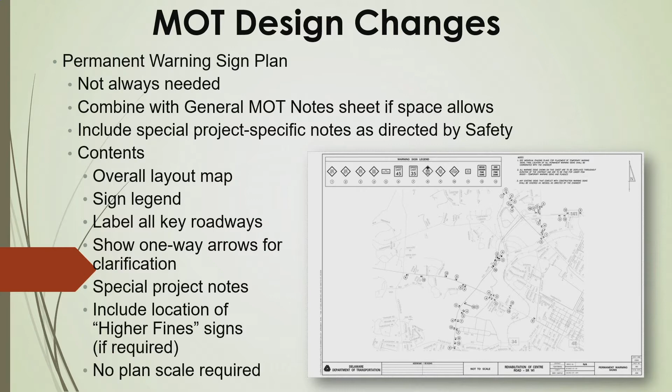Some MOT design changes: we're well aware PCC barrier wall deflects 4 feet, so in some situations we need to pin the barrier. We want to make sure that's called out on the plan so the construction staff know exactly which section of barrier wall needs to be pinned where you don't have the deflection in the construction zone. It also gives the contractor an idea of what he's bidding on as far as quantity.

Some other design changes: we want to show hashing for the length of need behind the barrier wall. Several years ago, a young lady lost her life after getting behind a barrier wall - not saying this was the case in this situation, most crashes have more than one reason. By showing this hashing, it gives construction and maintenance staff an understanding that you can't have any equipment or material in this run-out length behind the barrier wall. You want to give vehicles, in case they run off the road, a clear path to recover their vehicle without hitting a fixed object. Showing this hashing highlights the zone we're looking for.

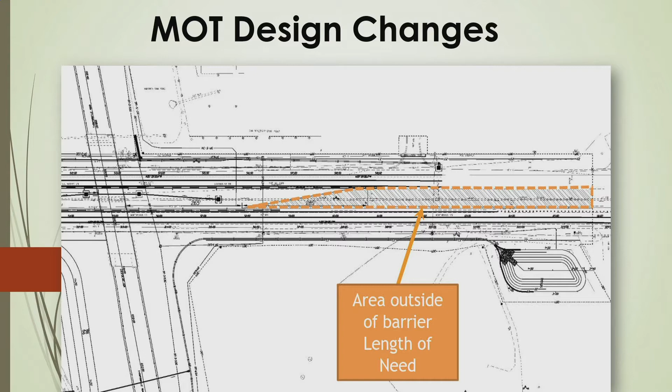We also want to show the taper inside lane closures. It depends on the speed, but this takes the guesswork out of the formula for your taper by showing it right on the plans - the contractor and construction staff know exactly how long that taper needs to be. We also came up with a new flag or head sign that says MUTCD compliant, and you put your own face in there.

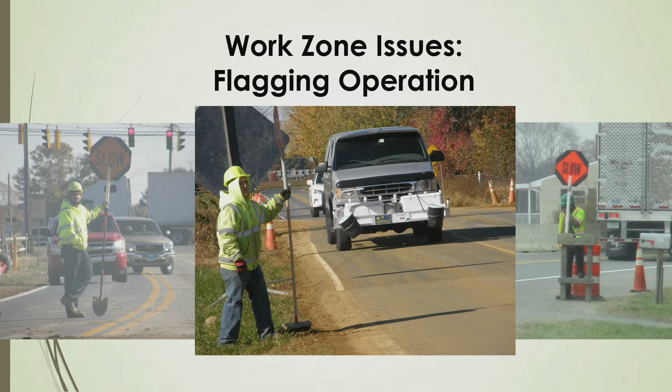Some common work zone issues - I know the secretary wants us to be innovative, and some of these flagger paddles are. They double as a shovel or a broom, but they're not compliant. One gentleman was very innovative and created his own sign stand with footrests, and it actually came with a cup holder.

Pedestrian detours - I know it's a problem, I know it's difficult. We go on these construction projects, you have a lot of hurdles you're trying to get through, and pedestrian detours is just another hurdle you have to deal with. I have a fantastic staff and I rely on them heavily. I'll tell you, if you run into a problem where you have to have a pedestrian detour, we'd rather use typical applications, but if you run into a problem, we'll work with you to help get you some sort of ped detour to get you around the construction zone.

Still seeing some signing issues. If you have a temporary sign, it's up more than 72 hours, it needs to be at least 5 feet above the ground.

When placing signs, you want to make sure they're not directly behind another sign. The traveling public needs to know exactly what they're coming into.

If they're driving into a detour, they need to know that ahead of time. If signposts aren't driven to the proper depth, we're going to know pretty quickly, because the first windstorm that comes through, that sign's going to be laying over at a 45-degree angle. We've all seen them. So make sure they're driven to the proper depth.

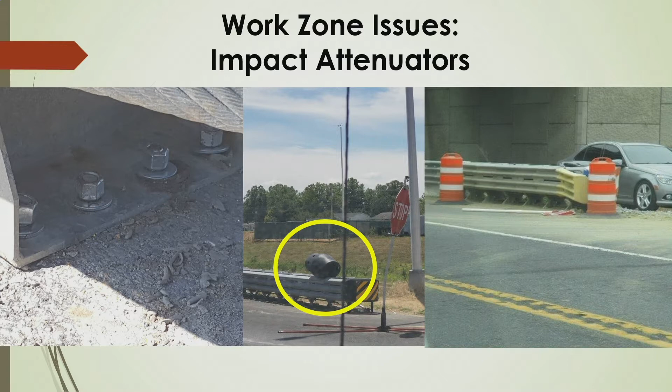And there's also a clear zone beyond the impact attenuators where you don't have equipment parked or vehicles. I'm not sure whose car this was, but obviously if a car gets behind in the work zone, they're going to hit the car instead of the impact attenuator.

Temporary barrier wall. Again, barrier wall deflects 4 feet if it's not pinned. If you have a drop off inside that 4 foot, that barrier wall is going right into the trench, and that vehicle is going to enter the work zone. So we want to make sure that we look at the plans when we're designing them, and make sure when construction lays this wall out, that they're going to have the proper 4 foot deflection.

Some of the things we're looking at is, right now our spec reads that all temporary barrier wall must have a letter that shows that it's 350 compliant from the manufacturer, or the wall needs to be stamped as 350 compliant. I think every piece of barrier wall needs to be stamped. That way the inspection staff in the field knows whether that wall is 350 compliant or not.

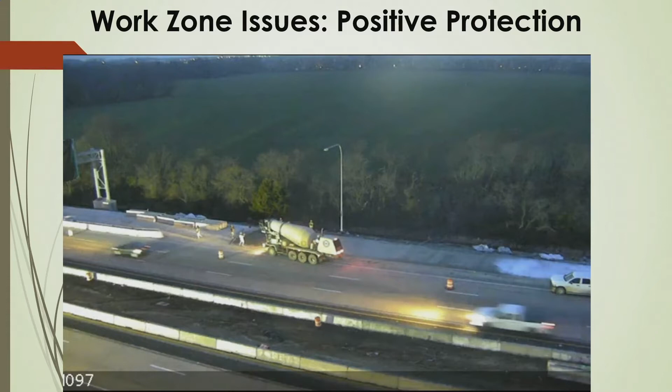Same project. We worked with construction a lot to work through some of these issues, but this contractor just didn't get it. So I seen this shot. Again, we had vehicles, no buffer lane, no positive protection for the blunt end of the barrier wall.

As you're entering a work zone, you need to make sure that you are displaying a clear message, so as the vehicle's coming in, they know exactly what to expect. We need to do our part. We ask vehicles to slow down in work zones, and we also need to make sure we're displaying a very clear message about what's going on.

So I hope this plays. I hope that Pam, you think this will play? So this is a video that we took going northbound on Route 1. They'll play? Awesome. Everybody makes mistakes, it's easy to do. But you want to be cognizant of what you're doing in your vehicle to notify the public of what to expect. Go ahead and hit play for me.

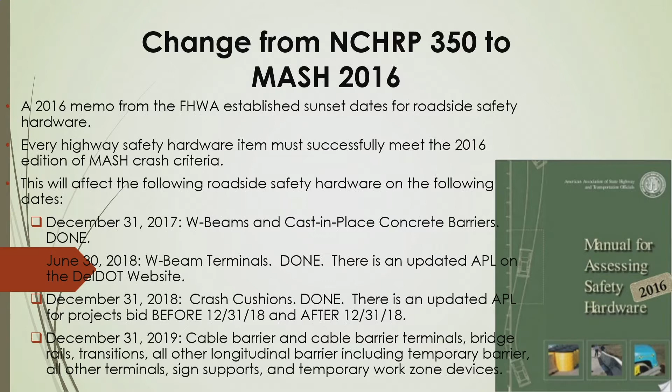fall under the temporary work zone category that are going to have to be MASH compliant. So why do we change, and why does MASH change? Because our vehicles change - the size, the center of gravity, the makeup of the vehicles. Some of the trucks now have aluminum bodies, which is crazy to me, but hey, it is what it is. We're starting to evolve, the manufacturers are evolving, so we have to change our testing criteria, which is why MASH changes.

What's next is our approved product list. This is why we have approved product lists - these products get tested to make sure they're going to react properly. Our safety section is working on an approved product list that's 350 compliant. Right now every contract submits that big fat 350 packet. If we just have a list of approved products that are 350 compliant, it'll cut that out. It'll also help us roll into MASH compliance, as MASH 16 compliant devices come online we can just update those item numbers and note whether or not they're MASH compliant.

So why do we have NCHRP 350 and MASH? Can we play this video? It's not playing automatically... if it won't play, that's fine. There we go.

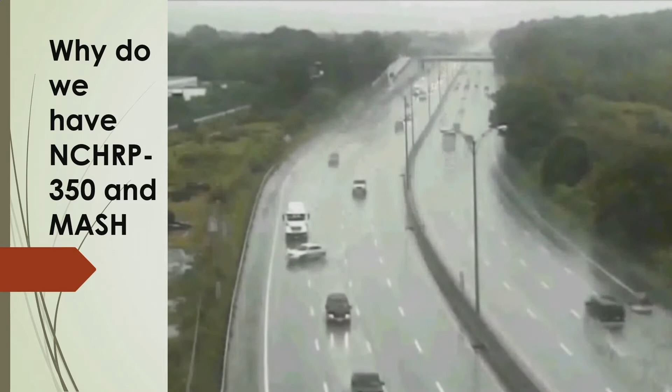Coming from the right side of the screen to the left.

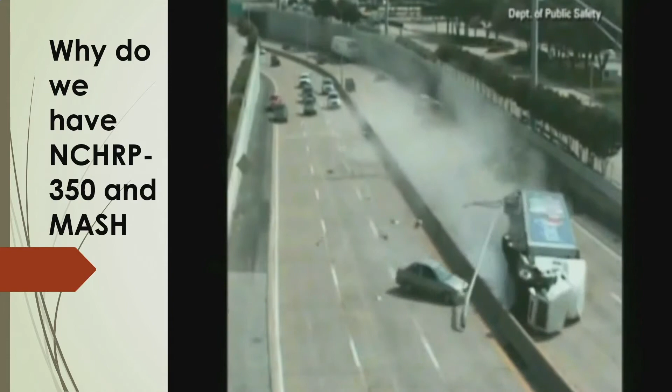You're going to see in this video where some of our roadside safety hardware worked great, and some did not, which is why some of the things we have and use have to be updated, especially some of our barrier wall. Some of the guardrails worked properly, some did not. Some of the barrier wall needed to get higher for MASH compliance, which is why that tractor trailer went over the other side of the roadway.

So why is product testing necessary? It wasn't that long ago we had the ET Plus that penetrated vehicles - massive lawsuit, changed the way we do things. We want to make sure that whatever we're putting out on our Delaware roadways is going to react properly. So that's why you have product testing.

We're getting a lot more requests for guardrail to be installed across the state. Some of the stuff we push back on, Pam is fully aware of - just because sometimes guardrail isn't the answer. Sometimes installing guardrail can be a greater hazard than actually running off the roadway. Ideal situation, a vehicle goes off the roadway and is able to recover on their own. This is worst case scenario - this person lived through this, by the way.

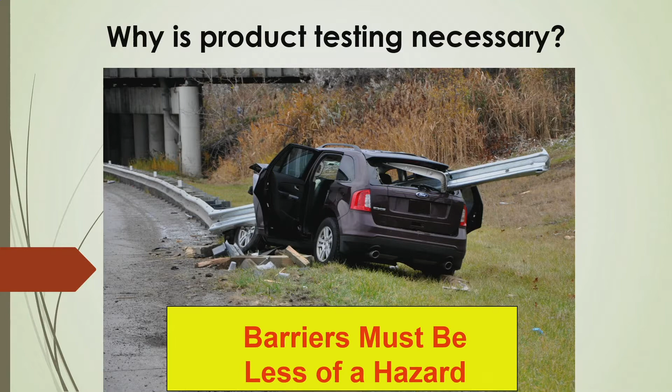So just make sure the barrier we put out in the field doesn't become a greater hazard than a vehicle running off the roadway. I'm going to close out with special events. So what are special events? These are parades, concerts, NASCAR events, running races, bike races, block parties - anything that happens on Delaware roadways.

Last year there were over 800 events approved under the special events section. Of those 800, 275 required DelDOT to manage the MOT for the event sponsors. We're currently seeing an increase in special events within the state of approximately 10% a year.

So why am I bringing this up? Why does this affect you? Well, it affects your projects, for one. Under Title 17 of the Delaware Code, Section 141 and 29, policy changes mean temporary traffic control costs for special events will be waived for nonprofit and charitable events. So if you're a nonprofit doing a special event on Delaware roadways, and we have a lot of them, you'll be able to have us come out and take care of your MOT at no cost to the event, because this way the money the charity raises goes right towards the charity. But this also puts an additional strain on our resources and capabilities, because we only have so many people.

So what does this mean for you? We want your help if you want to give it. If you want to fill out an SEO application, which is sent out annually, you'll need to take an incident management training course, which is taught by the Godfather, Professor Donaldson.

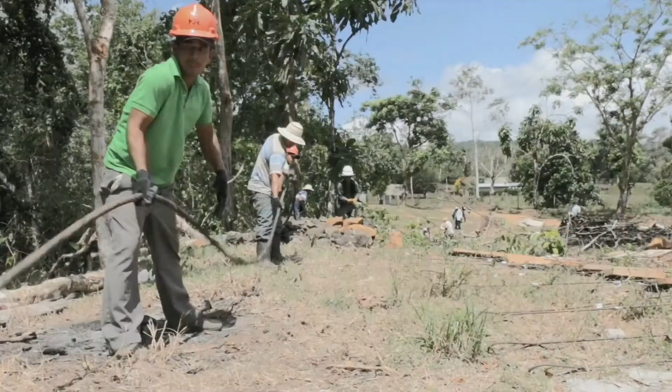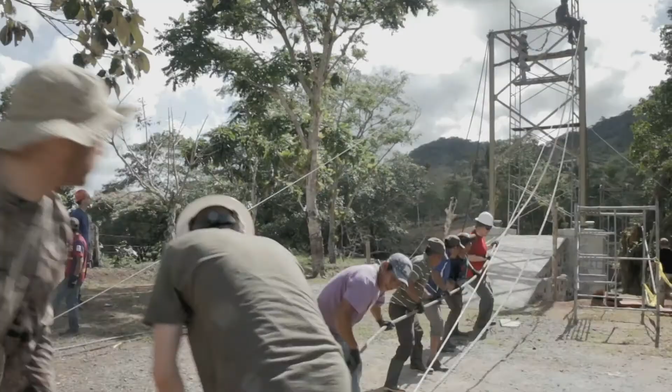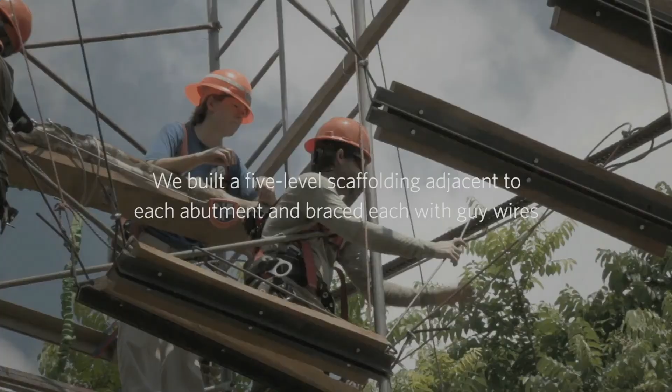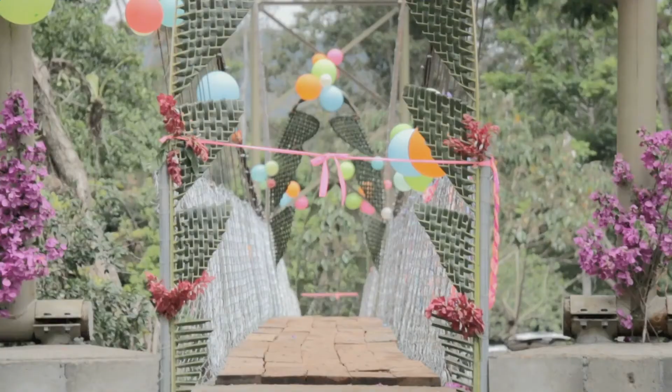Couldn't ask for a better site. Weather's been great, no bugs. Anytime we're having lunch or a break, we're always talking shop, discussing what's next and different ideas and how we're going to do it. It's been fun working with the locals. They've worked really hard and have been here every day helping us and really putting a lot of pride into their work. The country, the team, the people, everything has exceeded my expectations. It's been really good.

All right, so what in the world does that have to do with I-95? Well, actually, nothing. Every year at the annual AASHTO Committee on Bridges and Structures meeting, they put on a presentation about an organization called Bridges to Prosperity, showing off some of the things they do. This organization goes into third world countries and builds pedestrian bridges to help connect communities with more urbanized areas so they can get access to education and healthcare. I'd heard the presentation many times, and for whatever reason this year it really clicked. I mentioned it to Jason Arndt and Craig Stevens on our way back, and they were all in, as excited as I was about the potential. So we came back and pitched it to our group, and there was a whole lot of interest in the organization.

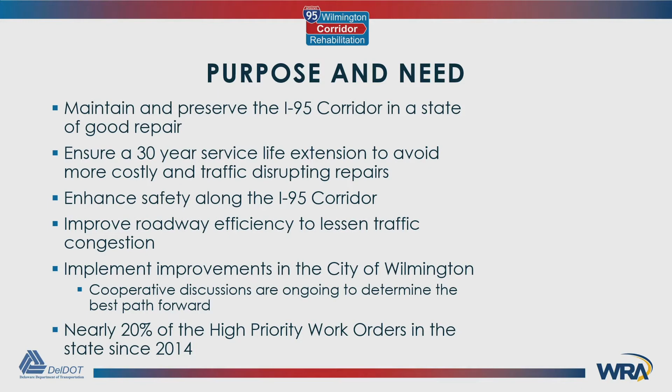And so, yes, obviously we want to fix that leaky roof, if you will, since we're having to respond to it continually.

Probably an ironic choice of words, and I'll talk about that in a minute.

Project overview: right now the project limits extend from the I-495, I-95 split at the southern end, up to the US 202 exit. We're rehabilitating 19 bridges as part of this, and over 3 miles of pavement. There's a stretch between the viaduct and the Brandywine that we are fully reconstructing, and the pavement to the south gets a mill and overlay.

We are fully reconstructing 11 exit or entrance ramps. As part of that, I mentioned the HSIP location - it's the South Jackson Street, 2nd Street on-ramp to southbound I-95. So we're going to reconfigure that, and I'll talk about the details in just a second.

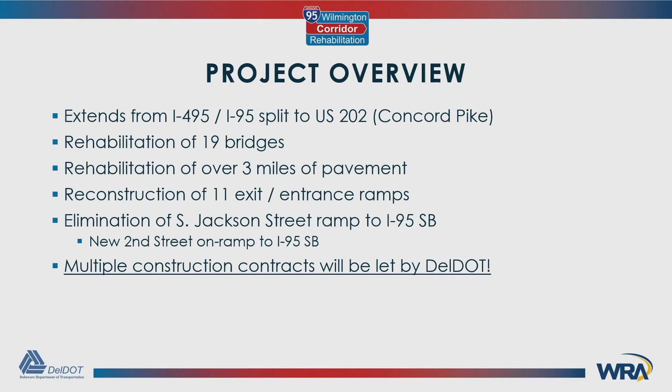One of the important things is, obviously from our standpoint we want to get as much work done as we can under one contract, but that kind of hurts our local contractors, so we've worked with them. We've identified some work that can be broken out and done either in advance or after the mainline contract, making the big contract a little bit smaller, decreasing the risk of us missing the 2-year window that we have. And it gives our local contractors some projects that they are more comfortable bidding on. I'll talk about each of those as well.

This is just a drone video of the full project limits. This is the southern end. We've got 3 bridges - one over Norfolk Southern, one over the Christina, and one over the Little Mill, or Mill Creek. There's the viaduct. You see the stadium, and Amtrak, which is our critical path on the project, by the way. It's going a lot faster there than in real life.

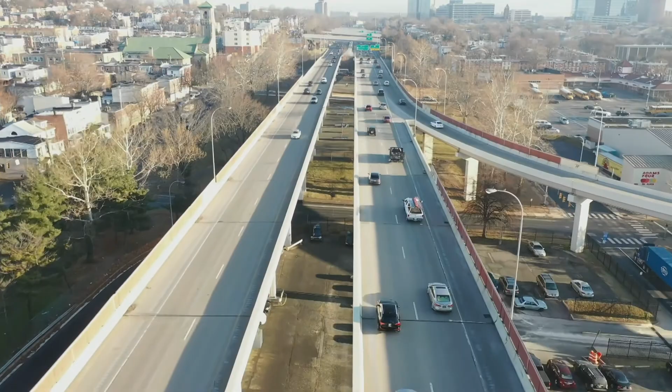The basketball courts there - that's one of our 4F coordination issues. You see the overpass section, that's the depressed section through the city, where we're reconstructing the pavement underneath. And there's the Brandywine River Bridge.

So you have to have inspirational music whenever you're about to tell people you're going to jack up their commute for 2 years.

A little history lesson: I-95 was built back in 1964. We widened it in 1978, which included the construction of the Martin Luther King Boulevard ramps. And then we did have a major rehab of the viaduct in 2001. I say major - it did include joints, but believe it or not, that was nearly 20 years ago, and that's kind of within the lifespan of joints.

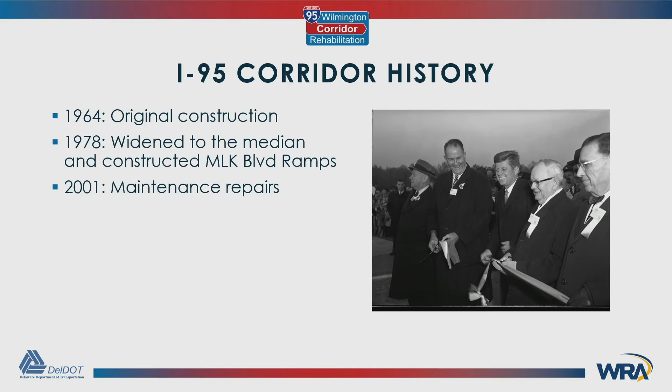There's a little timeline for you. We started this project back in 2014, so literally around the time we had I-495 closed, we found out we need to work on the viaduct and also the Brandywine River Bridge. So it was a pretty crappy summer, I'm not gonna lie. Since then, we have really dived into design. Obviously the early part was inspection and testing of the decks, to see what really developed the scope. We've done a lot of design since then, and we've just recently started the major public outreach effort. Obviously a project like this is going to impact many people, so we want to get the word out as much as we possibly can.

So I mentioned the breakout contracts - right now we have 3. We have one to do many sign structures along the corridor, work that can be done off peak or off alignment without causing any impacts to traffic. The HSIP location I mentioned, the on-ramp from 2nd Street, that work can be done without impacting the I-95 traffic, so we're going to pull that one out and make it go in advance. And then there's a lot of substructure repairs along the viaduct that we're going to break out as a separate contract to follow up the mainline contract.

We had some push to get this work done in advance, but to us it really didn't make a lot of sense to fix these substructures and then have our mainline contractor come in and attach scaffolding and jacking towers and all that stuff to our freshly repaired piers. So it just made a lot more sense for that to go after.

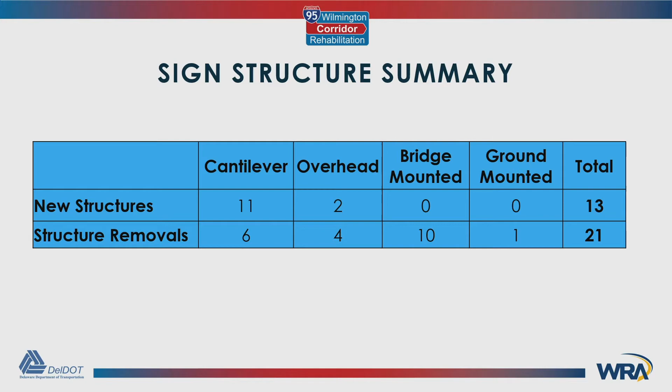You've probably seen these structures. This is the type that we're installing around the state. We've put up a whole bunch along the corridor, I-95, 495, as well as Route 1 over the last few years.

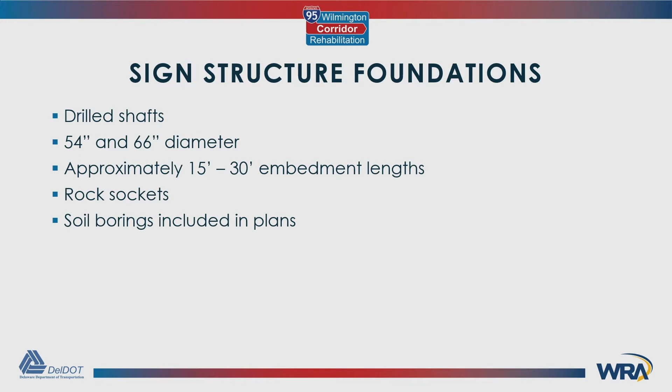The monotube structures there, very efficient. And then there's obviously the overhead. Just little details - drilled shafts. There's typically these sign structures, they get founded on a drilled shaft rather than a shallow foundation, a flat footing. Large diameters, 15 to 30 feet into the ground. Obviously, through Wilmington, one of the things you notice as you're driving on I-95 is the rock outcropping, so a lot of this work is going to be socketed into rock.

I mentioned earlier the MOT is pretty straightforward, off-peak. We're not really impacting traffic a whole lot.

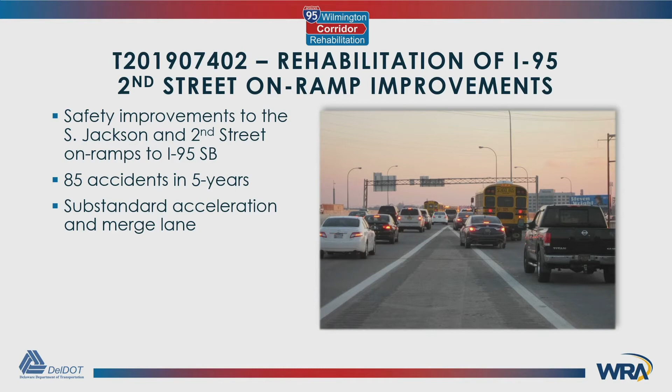So the HSIP location, which is the 2nd Street on-ramp. Right now, it came up because of the number of accidents - 85 accidents in a 5-year stretch, which is really high for an interstate. Obviously, in addition to the safety concerns, this is a high congestion area. Whenever there's an accident, it just backs up traffic everywhere. But in addition, it's a substandard acceleration merge lane, and so traffic often backs up on the Jackson Street on-ramp, or people making poor decisions causes delays on I-95, and so it's very important that we fix this while we're here. That's kind of the area.

So here's the on-ramp from Jackson Street, here's the on-ramp from 2nd Street. They merge, and then they have the substandard merge onto I-95.

So the improvement is to extend the merge and acceleration lane, so we have a full-length merge. Remove both ramps and then reconstruct a new ramp from Second Street with a new bridge and MSE walls, widening the Wilmington Viaduct Bridge where it ties out, and I'll show you that in a second. We're going to be widening a few of the spans, and then as part of this, we're going to construct some improvements on the city streets.

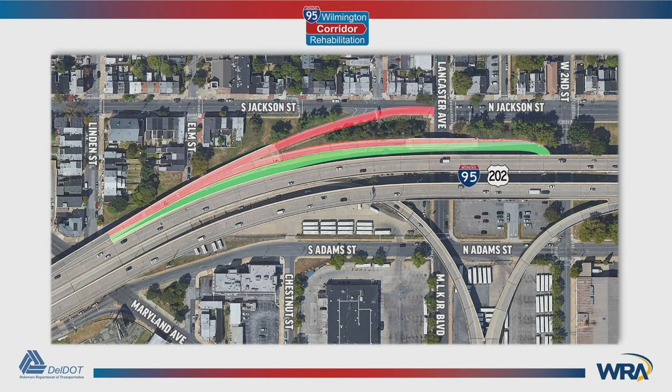So as I mentioned, here's the two ramps, Jackson Street to the top, Second Street to the bottom there. And then this is the proposed alignment. As you can see, we tie into the viaduct much earlier than the existing ramp, and that'll allow for a smooth merge.

Some of the improvements to the city streets - because we are getting rid of that Jackson Street on-ramp, now we have people coming from Jackson Street that still want to get on I-95, and now they're going to have to do kind of a loop in order to get on. So we're going to add dedicated turn lanes to Lancaster and Second Street, as well as modify the lane configuration on Adams Street. A big part of this, which will really help make the traffic flow efficiently, is to modify all the signal timings in and around that intersection.

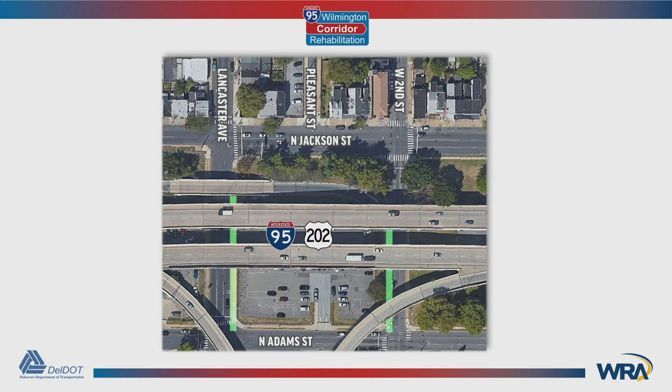So here's the area where we are adding the turn lanes in the engineering drawing. You can kind of see we're going to have two left turn lanes on Lancaster, on Adams, and then on Second Street, all merging onto I-95.

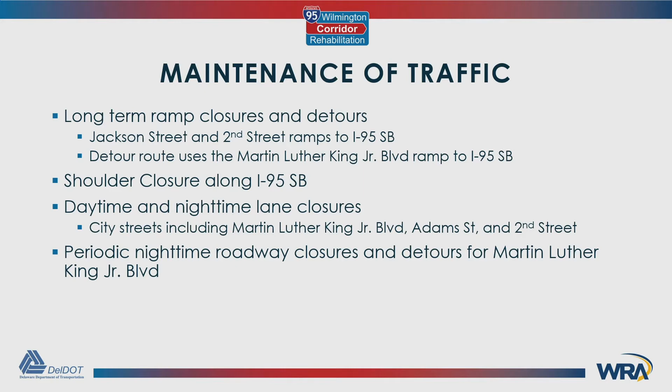So this one will be a little bit more impactful than the sign structures. We're going to have the ramps closed while we're reconstructing the new ramps. We'll have some shoulder closures along I-95, but we're not impacting the mainline traffic there. Daytime, nighttime lane closures. And we will have periodic detour of MLK Boulevard.

And finally, the other breakout contract, which is going to go afterwards, is just performing some of the substructure repairs on the viaduct structure itself - your typical substructure rehab work, concrete patching, some bearing plate replacements, that sort of thing.

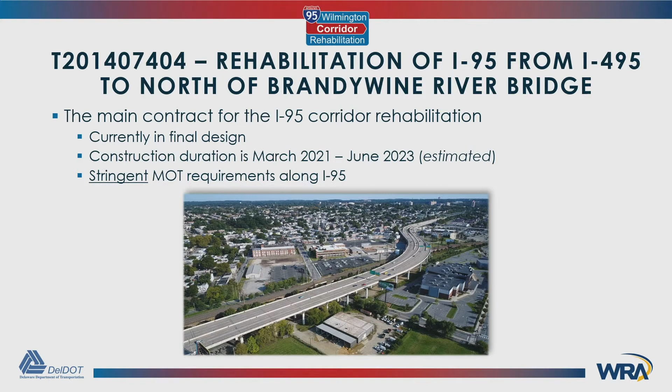All right, so the main contract, we kind of had some ground rules. Right now it's currently in final design. I mentioned we're doing our major public outreach. Construction duration - we're planning on starting in March 2021, and it'll be 2 years where we actually are taking a lane on I-95. So it's a 2-year contract, 2 years of MOT where we're actually directly impacting traffic on I-95. Because of that, we had very strict requirements on I-95 about what we could do.

Some of the work that's involved in this - huge amounts of work, really. It's 10,000 cubic yards of an LMC overlay. You're not normally seeing numbers that big. 100,000 square yards of hydro demolition. 15,000 linear feet of parapet - that's like 3 miles of parapet.

11,000 feet of roadway joints, so still over 2 miles of roadway joints, some of which we're going to be replacing with UHPC link slabs, which get rid of the exposed joint. This improves the durability of the substructure, the bearings, and the steel beams underneath, and of course other miscellaneous repairs.

Now, one of the questions we always get is, why can't you just add a roof over I-95?

That is not proposed as part of this. This project does not pimp my interstate, right? We are not on an MTV show led by Xzibit where he pimps out whatever it is you're trying to fix. They just want an extra $400 or $500 million added to their $200 million project. That's all. Unfortunately, we can't. You know, it's a great idea.

There's probably other ways that we can go about that, but this is not it. I talked earlier about the timeline, and by the time we get done with construction, it's going to be an 11-year project, and all we're trying to do is fix what we got. If you have a house with a leaky roof, you're not going to wait till you have money to add on before you fix that roof, right?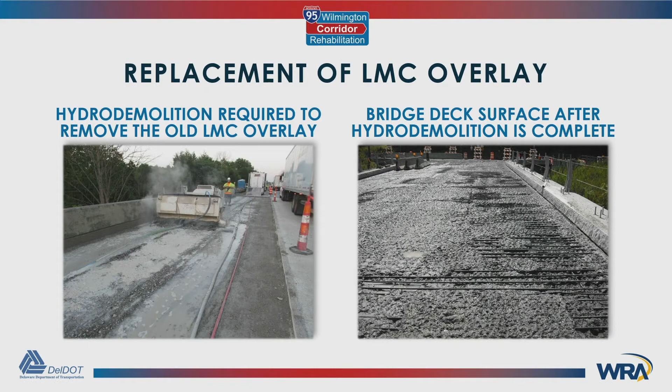All right, here's some pictures of what we are doing. Hydro demolition - it's basically like a power washer on steroids. You blast off the overlay, which gives you a really good bond for the new overlay. And that's them placing one of the LMC, latex modified concrete, overlays.

We talked about the barriers. Nearly 15,000 feet of single face and another 6,000 of double face. Some of the pictures that Mark just showed you in his presentation, you could actually see very similar accidents along this stretch. The median barrier at the southern end has a lot of punch throughs. You can probably see patched areas where there's guardrails just kind of holding it together, for people running through.

The barrier isn't really doing anything, so we're going to replace all of it. Obviously, we're going to upgrade all the guardrails so it's MASH compliant. And I mentioned the mill and overlay before.

So I mentioned the ground rules. Early on, we looked at whether we could close a direction of I-95. I believe the last time a major rehab was done through the city, it could be done, but unfortunately 30 years of traffic growth wouldn't allow that to happen. So we have to maintain at least one lane of traffic in each direction on I-95. We've laid it out where the 3-lane section in each direction, we're taking 1 lane down to 2 lanes in each direction. The 2-lane section, we're going to drop to 1 lane in each direction.

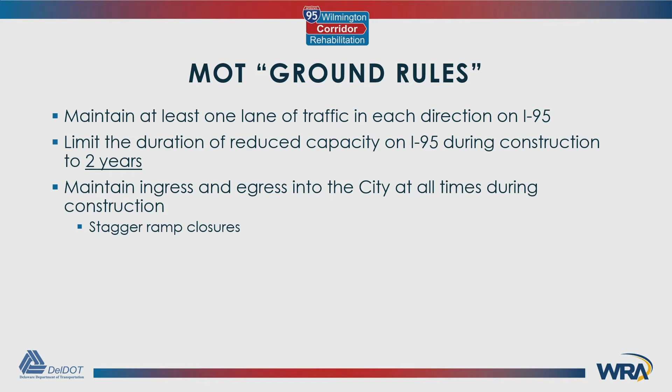We are under strict orders that it must be done in less than 2 years - it cannot go more than 2 years. And of course, we have to maintain a lot of egress and ingress in and out of the city through the ramps, so the ramps aren't going to be all closed at once. It's going to be staggered, and so we have to phase those as well.

So a lot of the work, obviously, is requiring phase construction. We're going to put something a little unique - we're going to move traffic from one direction, so northbound traffic will be moved over to the southbound side. We're going to run what we call contraflow. And I mentioned the staggered closures of the I-95 on-ramps. There will be periodic times where we have to close I-95 in order to do any of the MOT phase switches.

All right, so this is kind of a typical section. The top is existing - you've got 3 lanes in each direction. This is the part to the south as well as the part across the Brandywine. Those sections are part of stage 1, where we have to get in and reconstruct the shoulder to help make it traffic bearing. We are going to get in, take a lane in each direction, and improve the shoulder.

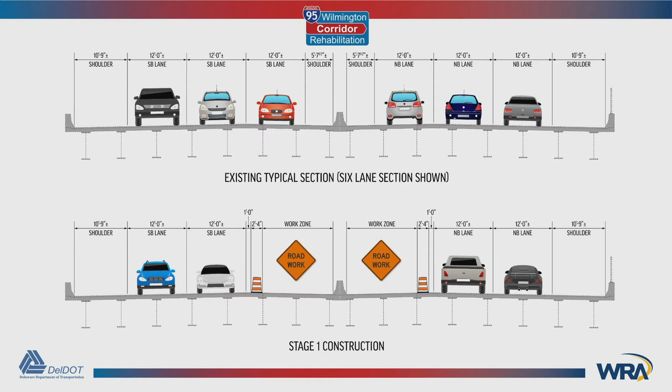And then stage 2 is when we do a contraflow - we're going to shut down the northbound direction and move all traffic onto the southbound side. One of the things I mentioned earlier was about that MLK Boulevard on-ramp. If you drive that way, you recall that's an on-ramp from MLK to the left-hand side of I-95 southbound. If we have traffic running like this, how are we going to get people on and off? Well, we're actually going to use that, and we're going to run contraflow on MLK as well. So what is currently an on-ramp on the southbound will, during this phase, become an off-ramp for I-95 northbound.

One of the advantages on the northbound side is that we have that MLK Boulevard on and off ramp. Unfortunately, on the southbound side it's much more complex, so we're not able to fully divert traffic onto the northbound side. We do have to maintain what we call a collector distributor road, so we have two phases in stage 3 where we have to switch. We actually have to do phase construction on that side.

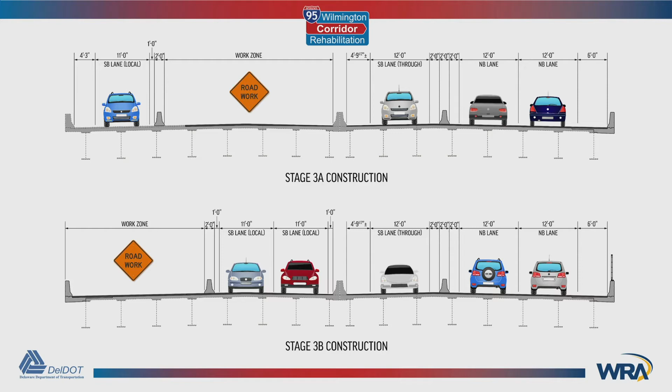So I mentioned that we have a lot of impacts to city streets, including the MLK Boulevard contraflow. With I-95's lane closures, we're going to send traffic scattering throughout the city. We've done a lot of projects in advance to help improve access in and out of the city.

At Carr and Marsh Road, we're adding a left turn lane as part of that project. We've got a bridge project on Northeast Boulevard where we're adding a left turn lane from 12th Street. The MLK sweep project is in construction now, improving access from the Route 13 corridor. And of course, the Christina River Bridge is nearly complete, which will give access to the riverfront from 13 so people don't even have to get on I-95.

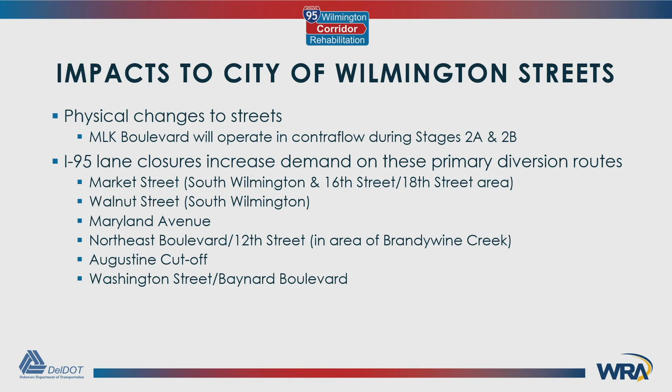In addition, there are a lot of locations in and around I-95 itself where local traffic is going to increase, so we are looking at ways to improve those streets as well. And here's the list.

As part of a big project like this, we have an active traffic mitigation plan, where part of the contract documents will require emergency response coordination between the contractor, DelDOT, and emergency response teams. We're also working out details on snow events, how we're going to properly maintain traffic during those.

I mentioned the active traffic management system. We're going to cover New Castle County with message boards that will have real-time information. We're also going to use the DelDOT app, so people leaving for work or leaving work to go home can check the app and see whether I-95 is the right route, or if they need to find an alternative.

We're working with John Sisson and DTC to improve other transit opportunities. And of course, we're working with major businesses and organizations like Rideshare Delaware to help employees find alternative ways in and out of the city.

As part of this, with increased traffic we're going to have increased structural demand on the pavement, so we have about $40 million of paving in and around the city we're trying to do over the next two years, including pedestrian facilities. We need to make sure all of our ramps are ADA compliant. We've worked out terms so that some of the ADA work will carry on into construction of the mainline contract, as long as it doesn't impact any of our primary routes.

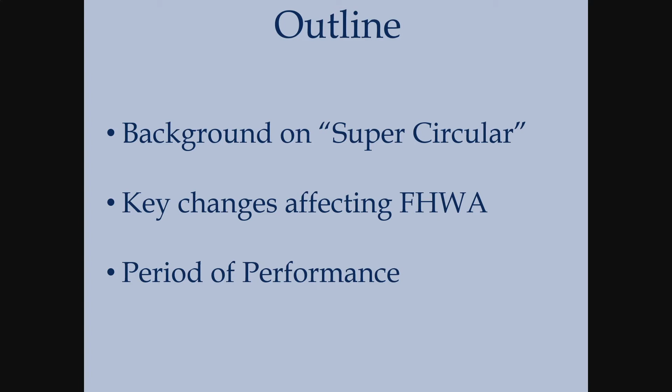So I'd like to offer you the following. We were a little bit pressed with time, so I was going to cut it down to three, but I guess we can maybe do four.

The OMB is the Office of Management and Budget for the government, and under Title II, under grants and agreements, we have the Uniform Administrative Requirements and Audit and Cost Principles, under audit, which is Part 200.

To give you a little background on how it came about, the Office of Management and Budget, back in 2014, decided to streamline government guidance under cost principles and audit requirements. The effort, or the Super Circular, was to consolidate and eliminate duplicative guidance found in 8 OMB circulars. The effort was to focus federal resources on improving performance and outcomes while ensuring the integrity of federal funds in partnership with state, local, and tribal stakeholders.

The key areas affecting Federal Highway are the pre-award, the post-award, and the cost principles and audit requirements. Period of performance goes into two of these, the pre-award and the post-award, so I'll briefly touch on those.

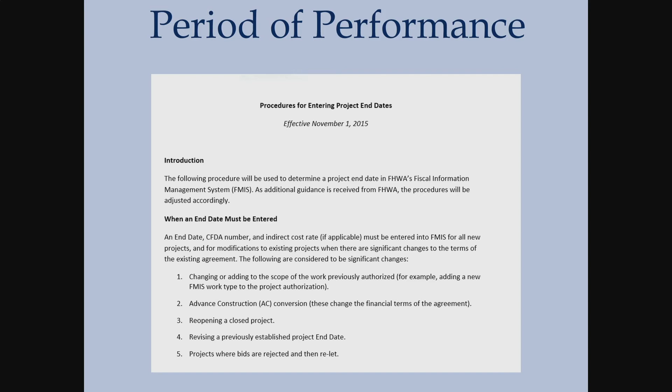So how does it work? Are there procedures? There sure are. As effective November 1st, 2015 - I don't expect you to read this, this is just a picture - Federal Highway and DelDOT got together and developed procedures for entering project end dates.

Essentially, what will happen is the project manager within their division is responsible for supplying information to the finance section on when the work will be complete with respect to the following areas: PE, right-of-way, construction, railroad, open-ended phases, or other projects. The project manager supplies a phase completion date, and then finance adds the number of months to the end date based on those procedures.

So for instance, if you have a construction project, the phase completion date is established by the project manager for construction and CE, and the work's expected to be substantially complete, and then you add 90 days for time of inspection and final payment. Just a quick note, for larger projects, 90 days isn't the be-all, end-all, so we understand there's going to be some flexibility if it's a fairly complicated project.

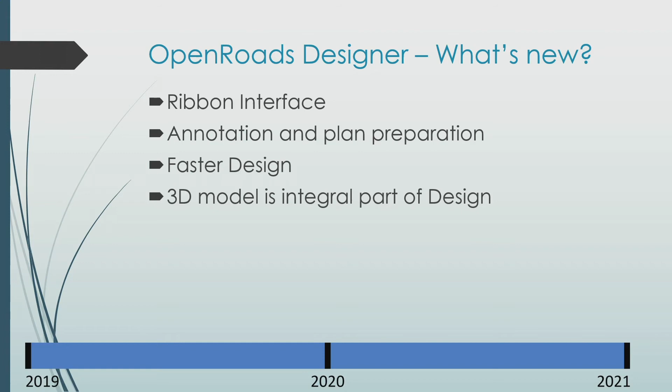So why are we doing all this? Basically, as we get into ORD, it's going to allow us to produce plans and designs faster and more accurately. As you're aware, 3D modeling is becoming a bigger part of our day-to-day lives and our jobs, and this further integrates that into design. So as a lot of you are aware, we've been upgrading a lot of the resources, specifically fonts, but also cells, line styles, all that good stuff. A lot of this is for ORD, and as we move forward, there'll be many more resource changes coming for that too.

So moving along, ProjectWise is effectively a document management system that is going to house all of our engineering data inside of it. If you're familiar with our internal structure, it combines parts of the Y drive, G drive, V drive, and the FTP. So kind of like a one-stop shop.

Timeline: we already have some trial projects going on inside of ProjectWise now. We're looking to do full implementation around the summer, midway this year. This thing is slow. As far as licensing goes, all consultants will be required to provide their own license inside of ProjectWise. One thing I am looking at is for those who do not need the resources constantly, doing a zip file of our CAD resources, hosting that up onto the DRC, and that will be updated monthly. So implementation will be the same kind of way as ORD. Any date or any project created after that implementation date will be done inside of ProjectWise.

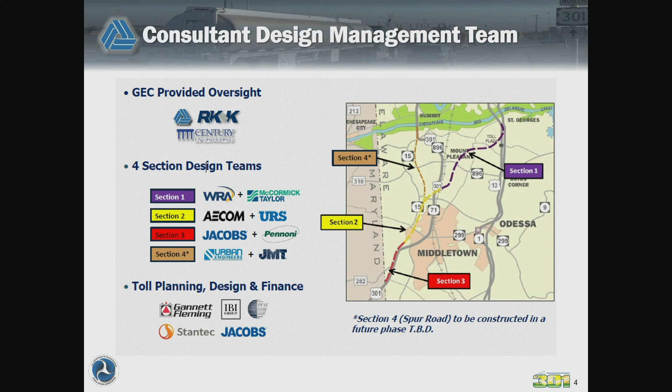There's the consultants listed here as well, and then also the contractors that actually built this roadway.

We broke it up into two construction groups that managed this project. One was Group 1 Construction, led by Chris Costello, with area engineers Katie Schwander and Susan Maldonado. Group 2 Construction was led by John Ledger. The area engineer there started out as Mark Buckaloo, but he then went over to the other side—Mark, thanks a lot—and Joe Spadaro took up the lead after that. So there's a tremendous amount of people that come out to do this effort.

So at the end of the day, who comes out and does the groundbreaking ceremony? Absolutely, your politicians, led by our wonderful leader, the secretary. But they're important too—they're an important part of the whole plan because they make it happen.

There was also a lot of coordination early on to break this project up into multiple sections, and as you can see there were many contractors involved—both in-state and out-of-state—to make this project very successful. That was one of the key things in making sure this project was delivered.

What's interesting to note is that you have to be careful about putting out dates for construction, because there's so many things that can happen. One of the first things we did was put out dates, and we got started with main construction in January of 2016. But prior to that, we actually had to do some advanced clearing contracts.

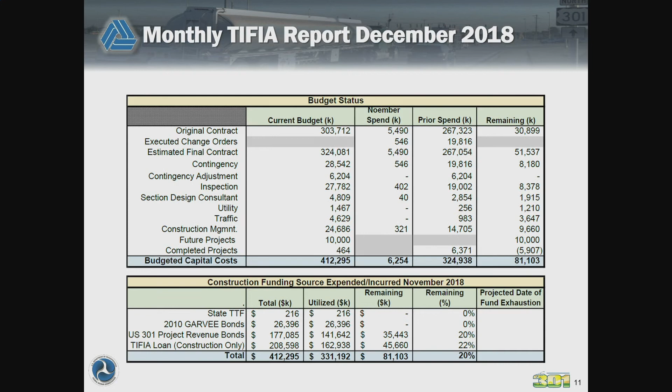The TIFIA reporting required us to track the progress of the work in terms of dollars spent and time. We also had internal SharePoint sites where we put everything we could into electronic files. We didn't use Unifier on any of these projects, except I think one of the last contracts, one of the landscaping contracts, where we actually used Unifier.

But this was really prior to Unifier being implemented, so the shared document management system had to be kept very close. The other thing is we kept track of the schedule and made sure we tracked the progress of the work, which was extremely important. A gentleman named Emery helped us maintain the project schedule along with Mike Lafferty, and they tracked how each project was progressing for the entire corridor.

We also kept track of little spreadsheets such as the earthwork - how was every project managing the earthwork, were they behind or ahead? There was a tremendous amount of dirt that had to be hauled and moved on this corridor, over 7 million yards of dirt, so that had to be managed. It was key to the critical success of this project.

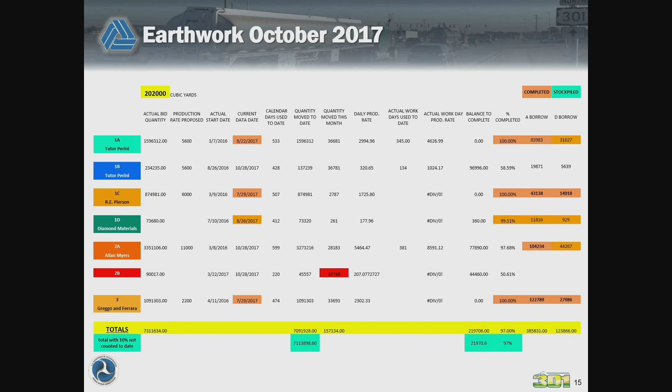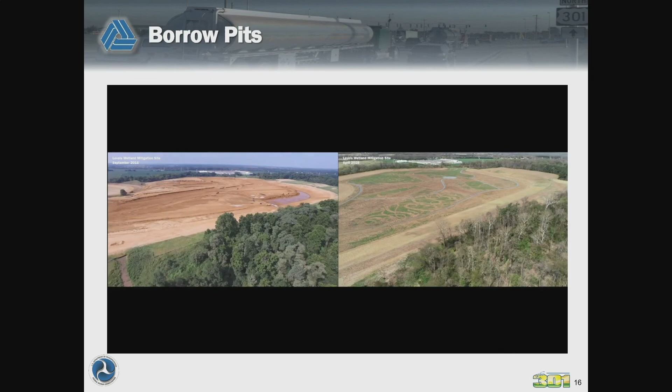They spent a lot of time going into this site and classifying the soils at different locations and different depths. It was also important for the contractor to manage this site - the key in digging a borrow source like this is managing your water. If you can't manage your water, you're not going to be successful with a borrow site.

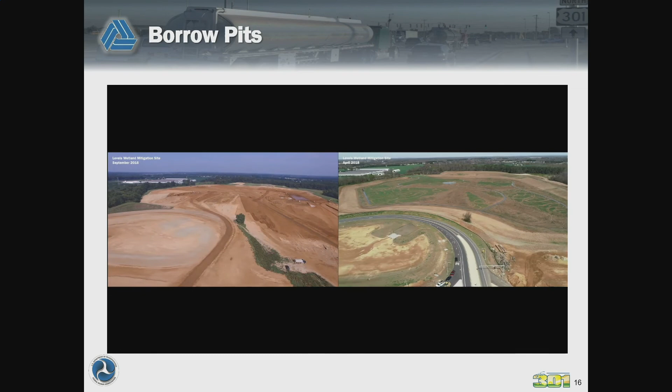So early on, he had to dig his ditches and put down well points in these areas to drain as he excavated. In this particular location, there were 2 contractors excavating from this borrow site. One had an interim milestone date where he had to be out of there - I believe it was early fall 2017, I'm not quite sure. The other contractor then took over the entire site. Both worked simultaneously, but then the 2A contractor stayed there and dug up the rest of the pit.

One of the key successes to this project was that we reached an agreement between both contractors where they were able to reduce the footprint of the Section 3 contractor and enlarge the footprint of the Section 2A contractor. In return, the Section 3 contractor was able to get more time in the bid. That was extremely successful because it allowed the Section 2A contractor to really go in there and hog the dirt.

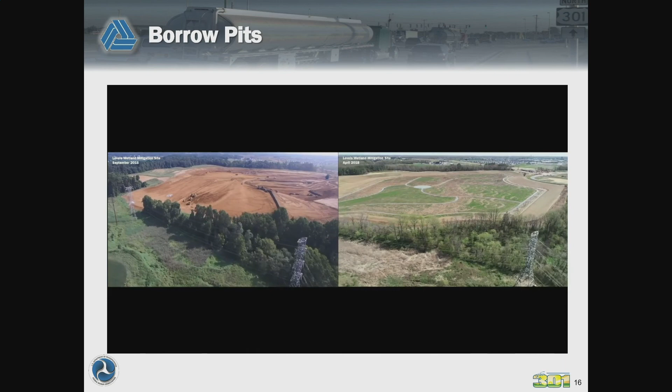Another interesting thing was that the contractor kept the excavator 8 feet higher than the actual trucks, so he could just excavate and dump rather than lifting up his excavator bucket and dropping it. It's amazing how much time you save with something like this. This contractor also realized, because of his haul roads, he was able to drive the trucks on the opposite side of the road because of the sharp bank, improving the efficiency of moving dirt in and out of the borrow pit.

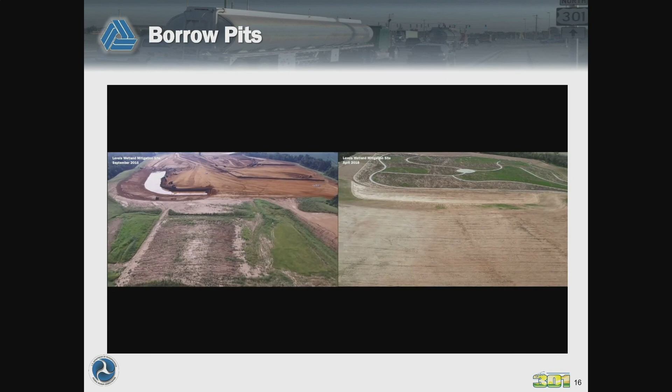So at the end of the day, you're really amazed by the tremendous amount of effort. You got to figure these guys moved essentially 3 million yards of dirt in basically 2 construction seasons. We anticipated the highest dirt moving activity would be about 10,000 yards a day. A contractor was able to actually achieve over 20,000 cubic yards a day on some days, very successful. This was a tremendous effort by all the contractors to really get the project moving.

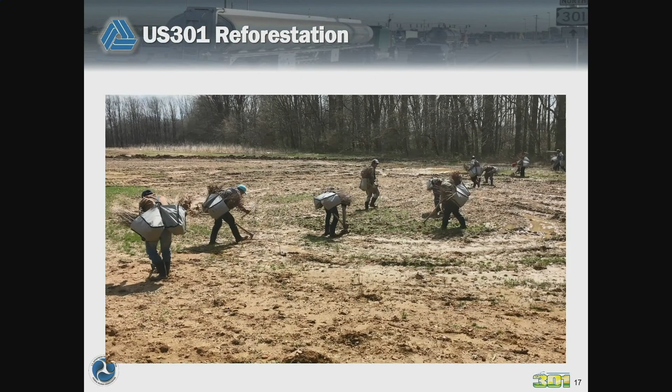Here's another video. What's really interesting is that we had commitments where we had folks come in with their hodags and bags and seedlings, and these guys planted thousands and thousands of seedlings. This was coordinated by Kenny Dunn's group and Christy. It was a tremendous effort after we had prepared the sites for the reforestation.

Another thing that was critical was the advanced utility relocation work. If you really want to have a successful project, to all the designers out there, everyone who's coordinating project development, get the utilities out of the way immediately. You may not be able to get all of them, but if you want to have success delivering a project like this in 3 years, you really couldn't be fooling around with any of the utilities.

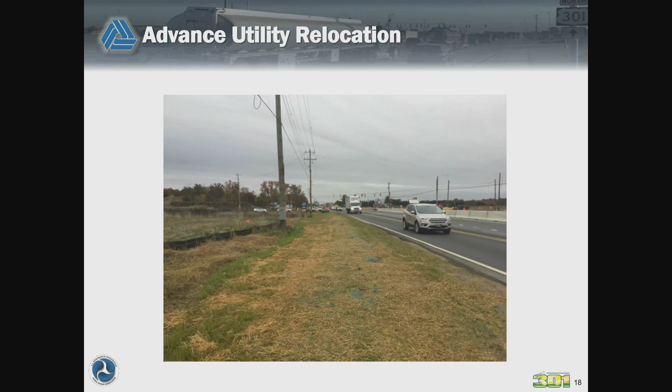The other thing was coordination with the first responders when we took lane closures, road closures, even access points eventually onto US 301. We had to coordinate with all the emergency responders. It's extremely important to let them know what we're doing throughout the project.

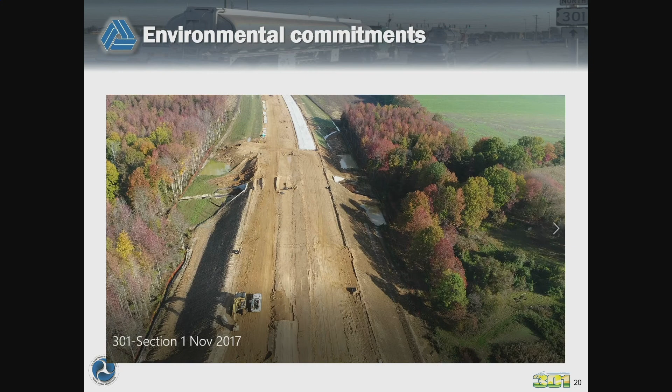And then there's also environmental commitments, all the resource commitments. Here you have a photo of an animal crossing, a culvert. It's extremely important that everything written in the ROD, that you committed to the public, that you committed to the USDOT FHWA, that you follow through with it. We had environmental monitors there, and we put up orange fencing early on. M&O was extremely helpful early on when we did the advanced clearing contract, coming out to actually set up orange fencing to get that contract started.

On SR1, we did in-place soil cement, and then we also did some pug mill. But on this project, what was really interesting was that we just went all pug mill. You get a much better product when you actually mix it at a pug mill and then bring it out to the project. You get a much, much better product.

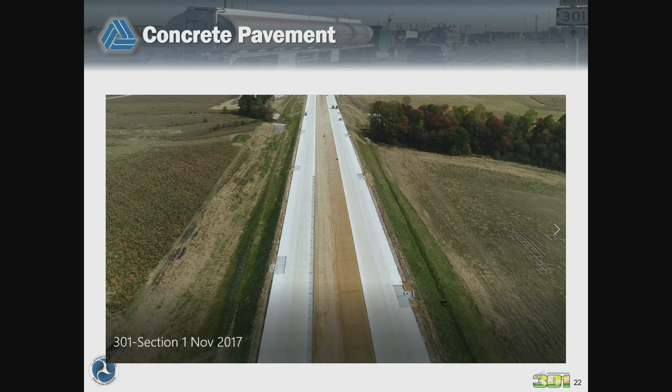And then finally, the concrete pavement, unlike SR1, spanned the full width of the roadway. We eliminated the hot mix shoulders, and we have concrete shoulders all the way across, which I think was an excellent idea for this project.

There were 3 interchanges on the project. This one here was the Jamison's interchange. What was interesting was that there was a roundabout, but the contractor came in and kind of changed things around, wanting a different approach, which DelDOT was able to grant.

We had to work with our resource partners, our environmental groups, because there were commitments made there. So we were able to expedite that and get it turned around. We had 28 bridges.

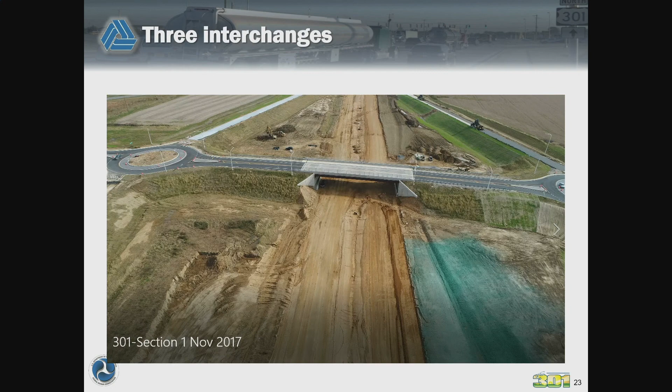Some bridges were very complicated, like this one, the flyover bridge over SR1. We had to manage all of the construction in terms of administering this contract, working with safety, working with traffic to try to get this constructed.

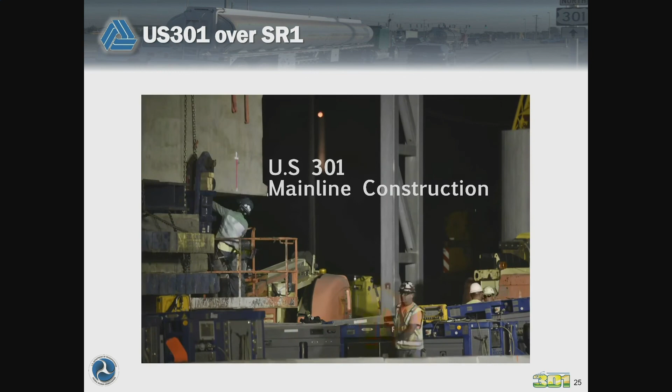One of the interesting things here, I want to show you a video. I don't know if I showed this last time, but this is really an interesting video where the contractor actually precast these beams, beam caps, reinforced beam caps in the median. As you can see here, he did it overnight to start setting these beams over top of SR1. He used self-propelled modular transport units. As you can see there in the background, it takes a lot of work, a lot of effort. And if something goes wrong, it's going to screw up traffic.

The first one we did actually tied up traffic. We were supposed to be off the road by 5 a.m. on Sunday morning, and we were off the road at 3 p.m. Mind you, we had shut down SR1 southbound, so you have to have the backup. You have to make sure that folks you're communicating with, coordinating with, in this case traffic safety, get things in place.

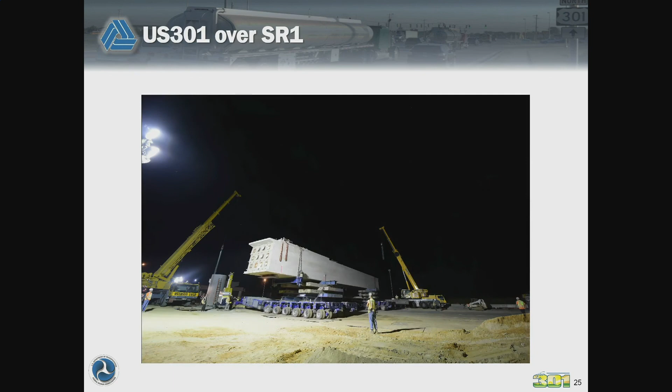And the second time around, I think Tom Clements always joked around, well, if you don't see sunshine or daylight, everything went right, or something like that, Tom. They didn't like that. I told them in the second one, it was good that the sun didn't come up during the middle of the video, and they didn't think that was so funny. But that's the truth.

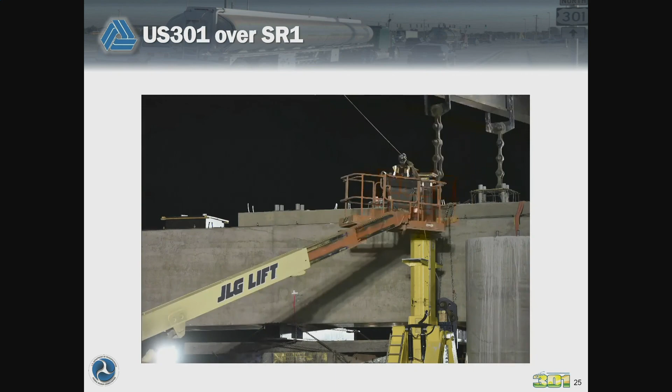So you can see there's a lot of rigging that has to take place here. You have these hydraulic gantries, as you can see, and with a spreader beam they tie the actual beam. Now these things weigh about 75 to 100 tons each, and there were two of these. So it's a tremendous mass of concrete that you're lifting and setting on top of these columns.

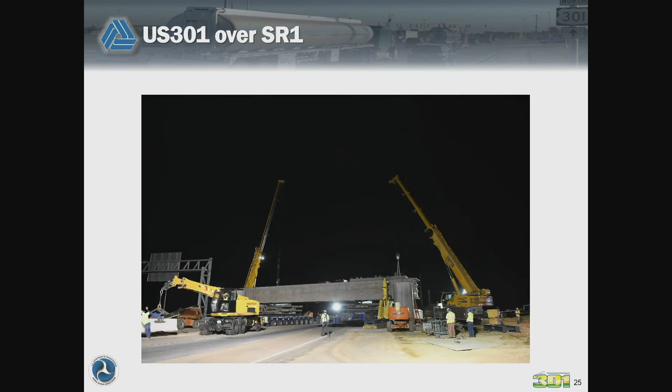I want to give a shout out to WRA. You guys did a tremendous job coordinating with construction, the contractor, to really make this happen. These guys went above and beyond the call of duty, approving things at the last minute, reviewing and going through the design and contractor submittal, making sure everything was correct. Excellent job, well done.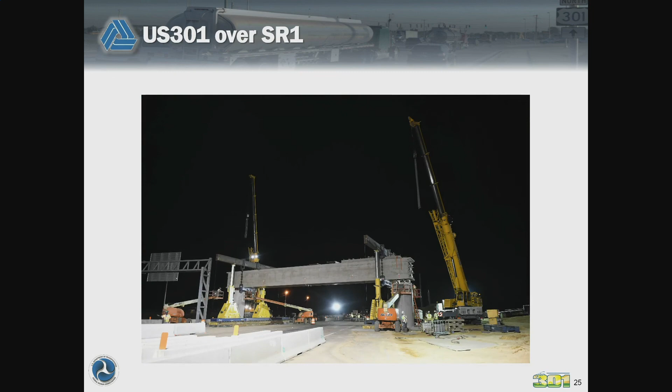And then obviously you set it on the columns. Once it's set, it's a matter of getting all the equipment out of the way, and that takes quite an effort as well. But these guys did a heck of a job doing this.

The other thing that's important in large projects, when you think in design, is where do I have an area for my stockpile? Because you're moving such large quantities of dirt. You may have topsoil you strip through the project, or materials excavated that need to go into a different phase, so you need to stockpile the material. It's extremely important, because it's much cheaper to excavate material on site than to import it. Imported material can cost $20+ a yard, versus $5 to $7 a cubic yard when bringing it from within the project. When you're talking about millions of yards, that's a lot of money.

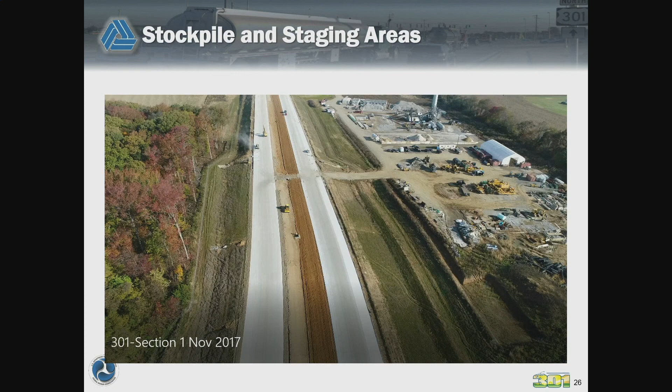Also, where are you going to put your trailers? Where are you going to stage your pug mill plants, your concrete plants? It's important to think about things like that.

One thing I learned very quickly is that the community wants, when you make a promise, you better deliver. As soon as we hit the ground running, they wanted their visual berms and the landscape. They kept asking when they'd get their visual berms and landscaping. It's important to follow through, not only on commitments made to the public, but also to separate your construction from those communities when it comes to dust and visual impact. They don't want to see the construction - they just want to live peacefully in their communities.

The other good takeaway from this project was future planning - they thought about the future spur road. Off to the right you can see an embankment that was built, and there was also one just beyond the screen, to the north where the road starts to curve. Embankment was placed there, and material was also stockpiled for the future spur road construction.

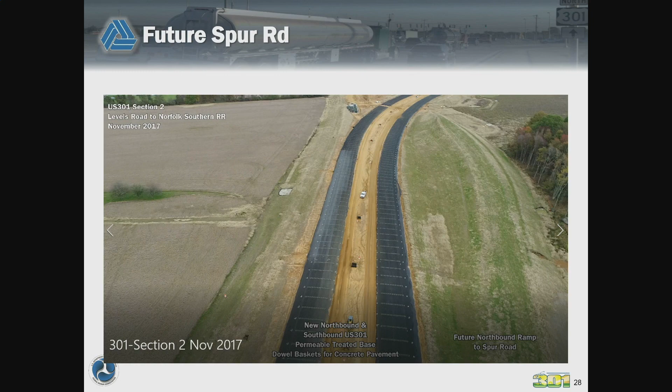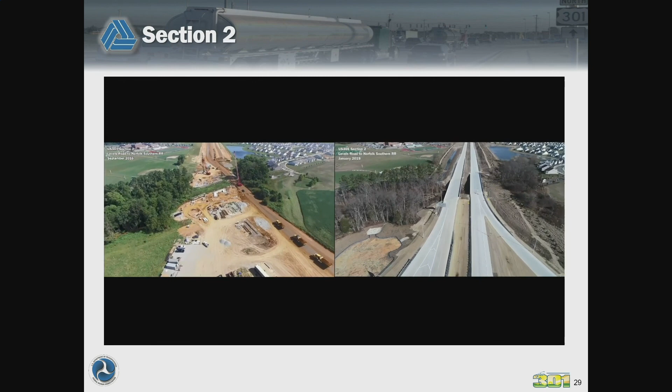I'll play this video to show an example of one of the sections. This is section 2 - to the right is the completed product during construction. You can see there's a lot of bare area exposed, but one of the things the contractors did a really good job on, for the most part, is controlling the erosion and sediment leaving the project.

They were able to maintain good E&S perimeter control throughout the corridor. You can see how they were able to wet the grade to keep down dust control. On a project like this, you may also want to think about applying chemicals if it really gets out of hand.

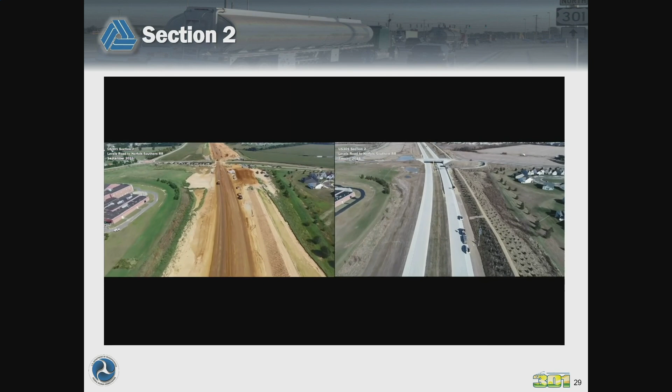During these 3 years of construction, we had probably some of the wettest seasons we've had. 2018, I think, broke some records from what I understand. It was unbelievable, but through all that, the contractor was able to really attack this project very, very hard.

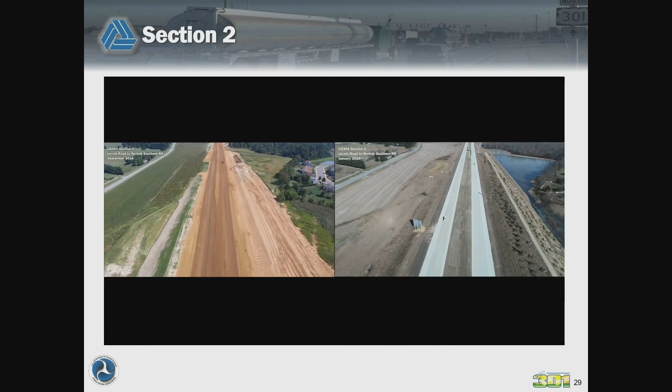Some of the things also on Bunker Hill, we just passed it - you've got to think about not only motorist traffic, but there was also a high school adjacent to us, just to the west side, and kids were crossing there on Bunker Hill Road where we had these large Eucs. So we actually had to place a flagger for pedestrians just to monitor the children and make sure nobody was walking across these very large pieces of equipment.

These guys were actually really hauling. If you ever got in front of one of these Eucs, it was actually pretty scary - you had to pull over because these guys were literally flying. So you've got to think about that.

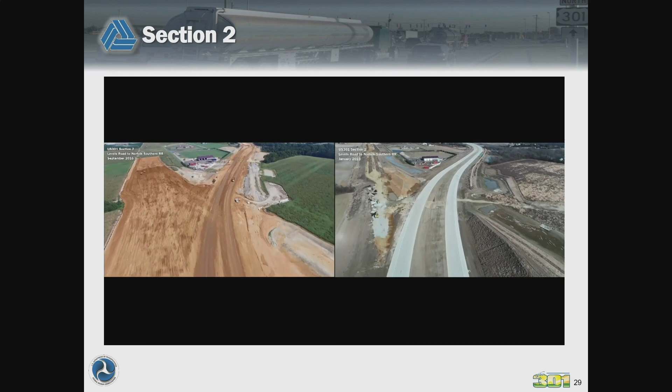The other thing I mentioned earlier was having construction informational meetings. I believe we had them monthly, then switched to quarterly, and I'm not so sure we're having them at all now. But it was important, especially up front with the community - a lot of questions, they wanted to know what's going on. Also maintaining your websites - the department's really pushing to make sure construction projects have up-to-date information on their website, which was extremely important.

The other thing is the noise waiver. As designers, we need to make sure we get noise waivers. During construction we didn't have one in place, so we had to work with the town of Middletown and New Castle County to get noise waivers, because the contractor wanted to work certain activities at night, especially concrete in the summer when it's hot - you have to go at night. They gave us restrictions in sensitive communities like Spring Arbor or Airmont up north, to really try to stay away from noise-producing activities there. That was extremely important to coordinate with them as well.

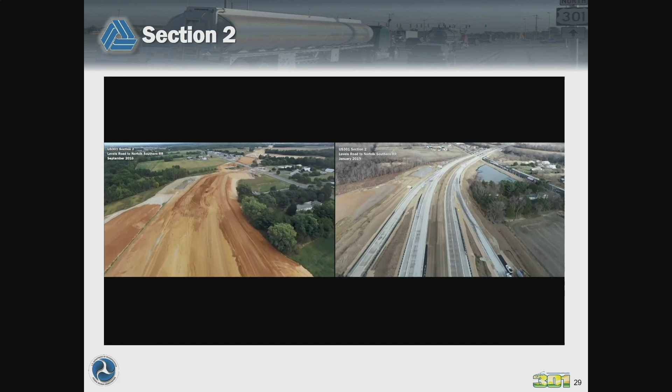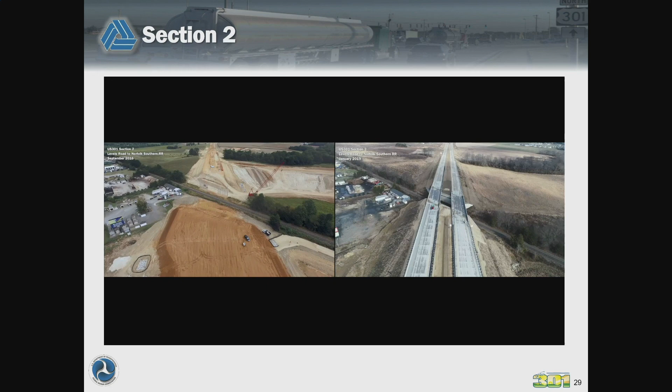The other thing I wanted to mention is that the designers really did a great job developing the plans throughout the corridor. There really weren't major changes - some of the issues we got were quantity changes that weren't quite correct, but otherwise there weren't any major design issues throughout the project. They spent a lot of time early on during project development to get things right, and we were able to work with the contractors to keep these projects moving forward. It was really a tremendous effort by all parties.

So just some interesting facts: total, 28 bridges, about 4.7 miles of H-piles driven, 12.1 miles of concrete piles driven. We had just under 30,000 truckloads of concrete delivered to the project or made on site, 113,700 tons of asphalt pavement, over 7 million cubic yards of dirt moved, and we constructed 14.5 miles of brand-new roadway on this project in 3 years.

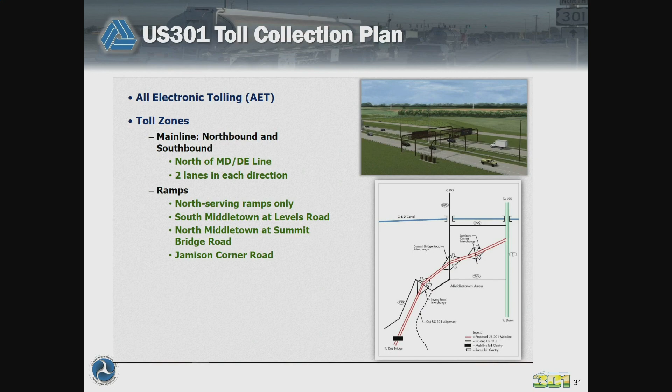Also interesting, we had the toll infrastructure contract and the all-electronic tolling system that had to be put in place. We had to coordinate with the contractors to make sure the ramps were available, the fiber was being run, and the gantries for the foundation while we were constructing the main line. So there was a lot of coordination. And as somebody mentioned earlier today, we're generating about $1 million a month in toll revenue, so it's been a really tremendous success on this project.

Despite Rob saying that it was frustrating - yes, there were moments it was very frustrating, a lot of pressure we were under - but it got done. So it was a very successful project.